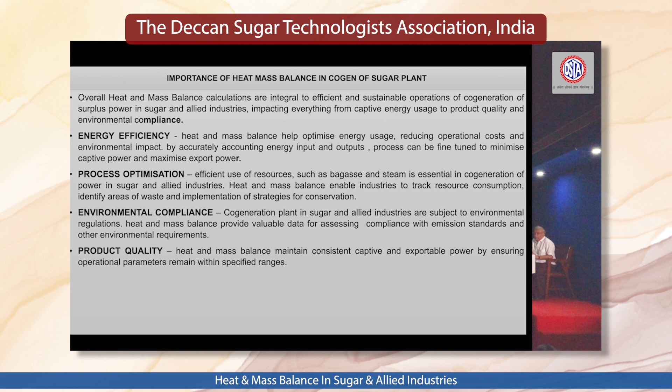So this is the importance of the heat mass balance. The study of the heat mass balance helps energy efficiency. I have a vision problem. Next slide.

So the case study of a 5000 TCD proposed sugar plant with 3 cases: a Cogen plant with a plain back pressure turbine, a double extraction back pressure turbine, and a triple extraction condensing turbine. The comparison of these 3 cases is worked out, and I have displayed here the case of the triple extraction condensing turbine.

The fiber percent is considered as 13.5. Bagasse moisture is considered as 49%. Bagasse pol is 2%, and for calculation of bagasse percent, 77% is the purity of the last extract juice. So the total bagasse is calculated. The bagasse used for the bagacillo is 0.8%, and for stoppages 1.5% bagasse is considered. So the bagasse production is 68 TPH, and 58 TPH bagasse is available considering the use of bagacillo and stoppages. Next.

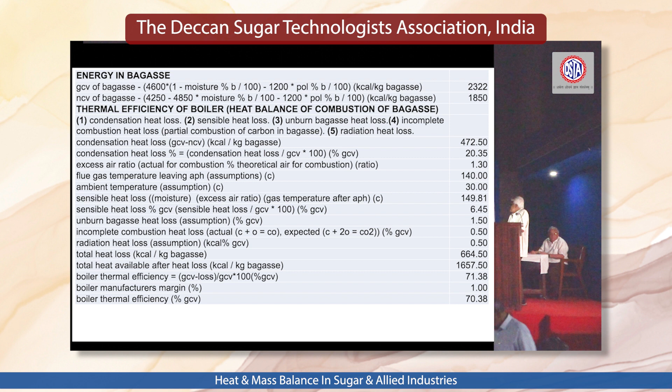Then the process steam demand is considered as 30%. So at this 30%, the steam demand is 68 tons.

The HP heater requires 11 tons. The first extraction is called the HP heater. The second extraction is called the LP heater. LP heater demand is about 13 tons. The deaerator steam is 6 tons. Condensing route is 49 tons. So the total steam generation is 147.

Here, it is considered that the cogeneration plant will work only in the season. Total bagasse will be consumed or used as a fuel during the season only. Because of this, the boiler capacity increases, the condenser load increases. I have worked for this pure back pressure and double extraction back pressure, and the comparison is also displayed in the last sheet.

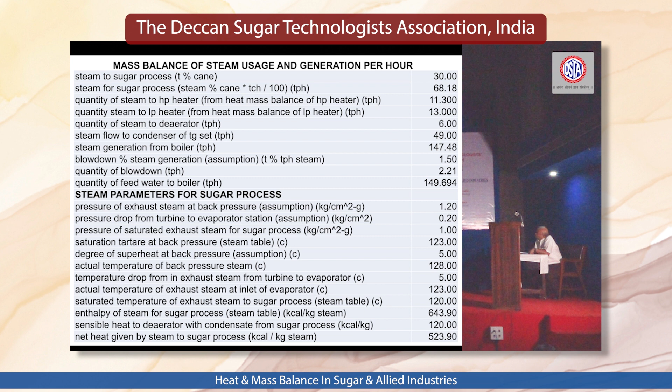So with this system, the steam required for this HP heater is worked out, and that is 10.97 tons. Next.

This is a calculation for LP heater. Outlet temperature of LP heater is 181. Again, there is a temperature rise of 10 degrees for the heating of steam, and saturation temperature is 191. And similarly, this is worked out, and here the degree of superheat, instead of 110 in HP heater, here the degree of superheat is 55 degrees, and because of this, the efficiency is increased, that is reflected in the power generation, and steam consumption is increased to 16.2.

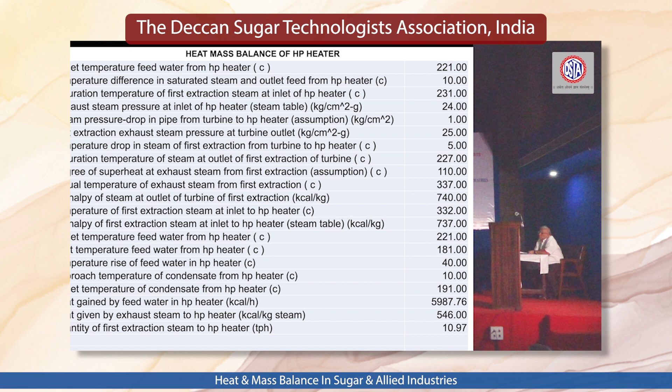Next. The calculation for deaerator. The deaerator receives water from HP heater, LP heater, deaerator steam, process steam, condensate from condenser of TG set, and makeup water. And all these temperatures are known. The HP heater condensate comes to the LP heater, and from LP heater some flash heat is recovered, and it comes with HP heater and LP heater to the deaerator.

If we go for this double extraction back pressure turbine, in that case, this temperature of this HP heater, LP heater and sugar process is more than sufficient, so no deaerator steam is required. But here, due to this makeup water and the heat recovery, about 6 tons of steam is required for the deaerator. The total steam generation is known. Considering the blow down, the total water requirement is known, and from this total heat divided by the feed water to the boiler, the temperature of deaerator is 114.

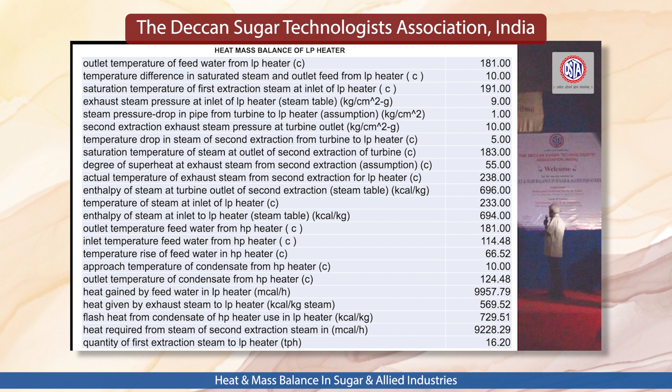Next. Then the parameters of this TG: there is a pressure drop of 3 bar from boiler to turbine. So the inlet pressure of the turbine will be 107 bar, and the temperature drop of 10 degrees. The temperature of steam at the inlet of the turbine will be 530. The first extraction is at 25 bar. Second extraction is at 10 bar, and this is the enthalpy of the inlet to the turbine.

The efficiency of the TG set is 95%. The mechanical efficiency of the turbine is considered as 99.5. Efficiency of the gearbox is considered as 98%. Alternator mechanical efficiency is considered as 99.5. And alternator electrical efficiency is considered 98%. So overall efficiency of this set is considered as 95.

Then turbine inlet steam parameters. So these are the repeated things here. So the enthalpy of the turbine at the inlet is 823. Inlet pressure is 107 and inlet temperature is 530. Next slide.

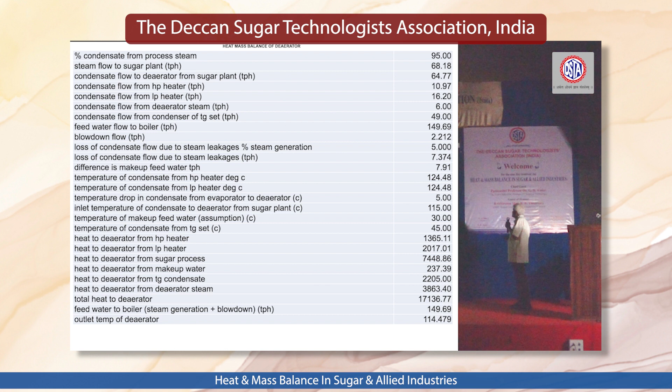Then power generation by HP heater, LP heater, deaerator and process steam. The inlet enthalpy and outlet enthalpy of HP heater, the difference is 83 kilocalories per kg. The steam flow is known, so from this we can calculate how much power is generated, and this is 1005 kW. This is from HP heater. From LP heater, here the heat recovery is increased from 83 to 127. So because of this, specific consumption is reduced, and here some steam is increased, but the efficiency is also increased. So the power generation is increased from 1005 to 2273.

Then for the process, the enthalpy at the outlet is known. Here the reduction in the enthalpy is 173. Here it is 83 at the HP heater, at the LP it is 127, and the process it is 173. And because of this, the power generation is 14,176, so about 14 megawatt power is generated here. 2 megawatt power is generated at the LP heater, 1 megawatt power is generated at the HP heater.

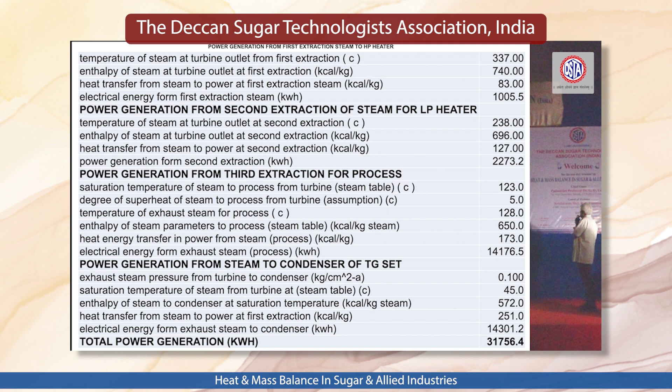At the condensing, the absolute pressure of the exhaust steam is 0.1, saturation temperature is 45, and about 49 tons of steam is passing to the condenser, and the power generation is 14.3 megawatt, and total power is about 31.7 megawatt. So total power generation is 1005 plus 2273 plus 14,176 due to the process, 14,301 due to the condensing, and total power is 31.758. This power generation is known, steam flow is known, the specific consumption is about 3.8.

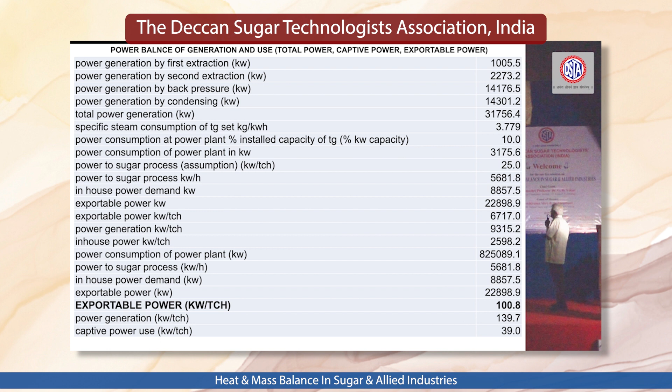Now about 10% of the total generation is required for the boiler and turbine. So this is 31 megawatt. So out of this, 10%, 3 megawatt power will be required for the boiler and TG set. 25 kWh per ton of cane is considered for the sugar process, and the power requirement for the sugar process is 5681 kW. Total power of the process plus the power required for the cogen plant is 8857 kW, and this total power of 31 megawatt minus this 8.8 megawatt, available power for the export is 22.8 megawatt.

The total units generated per ton of cane is 139.7, and the exportable power is 100.8 units per ton of cane. Total power generation is 139.7 units per ton of cane, and power consumption as captive power is 39 kWh per ton of cane. Next. So this is the bagasse balance.

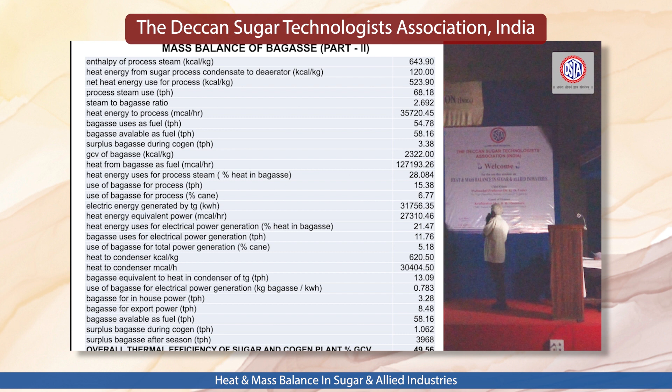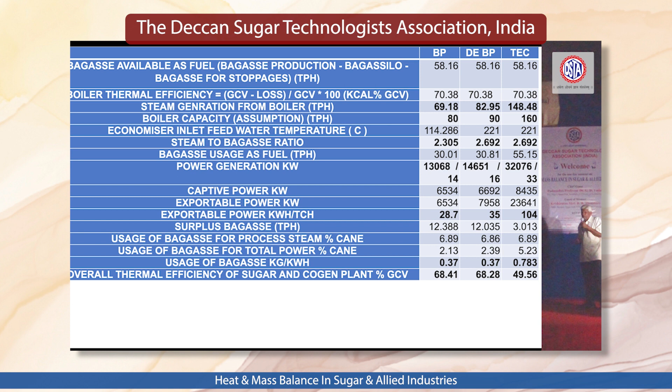Thank you. Thank you very much, sir. It's a lovely explanation, and we do expect better than this next time, sir.

Okay. Once again, the submission is these two papers. They are really good papers. They have done very detailed calculations. We have Excel sheets available with us. Those who are interested can always approach the office and get the Excel sheet, wherein you have to write your variables and the answers will come directly.

A very nice presentation, a studious presentation by Mr. Borude. Since we are behind the schedule, very brief interaction I would like to ask from the audience, if there is any question. Especially Mr. Shrikant Shinde of Cogen India Limited, any expert opinion on this heat balance? Mike.

It is the best presentation. And since long back, this discussion on whether back pressure is required or whether double extraction condensing is required, the issue was going on. But according to me, the back pressure turbine is only used during the season, but the double extraction condensing turbine can be utilized during season as well as off season. That is the beauty of this.